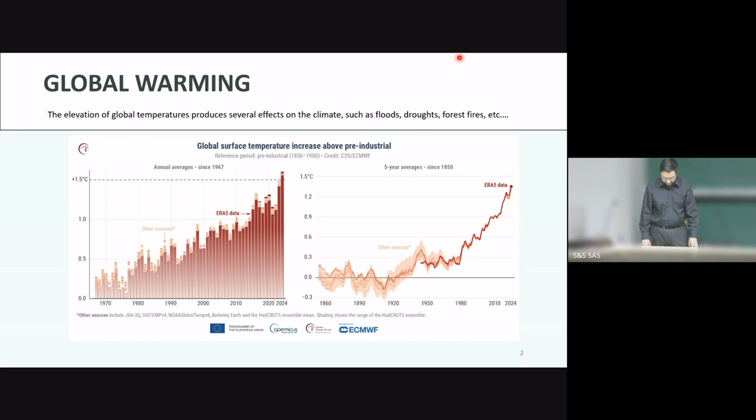Regarding global warming, we have seen the increase in temperatures during the last decades, and this rise in temperatures has many different effects on the climate, such as floods, droughts, and forest fires, among others. This rise of temperatures is linked with different activities of different sectors, among them agriculture, deforestation, or other sectors.

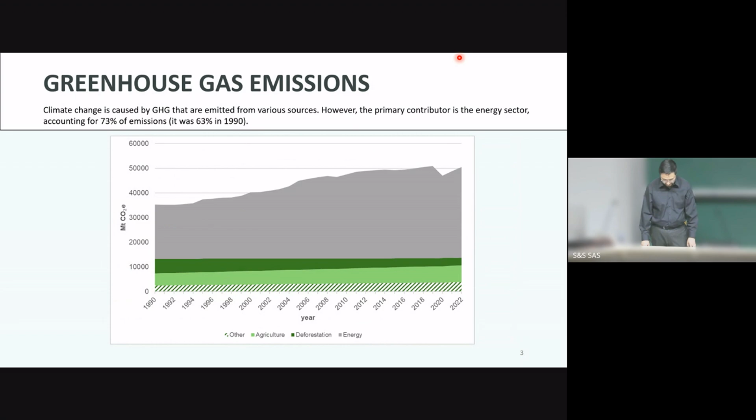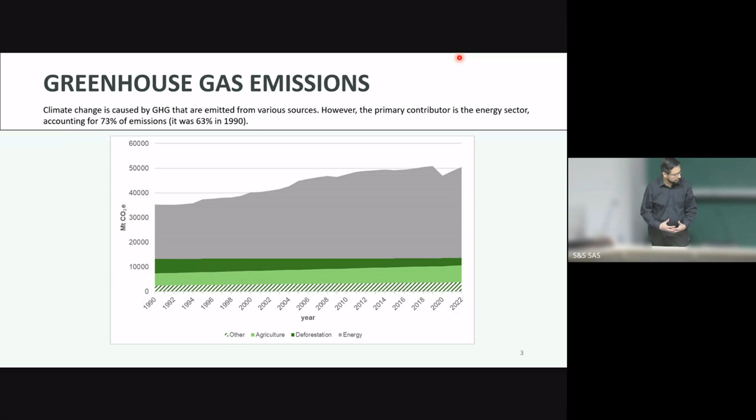But there is one key sector which is responsible for most of these greenhouse gas emissions, and it is the energy sector. As you can see, it's a sector that is increasing over time. And it's for this that it is important to study the assembly of the energy system.

To take a look into the energy system, we can start by looking at the demanding sectors such as transport, industry, or residential. These demanding sectors of energy will take the energy initially from primary resources.

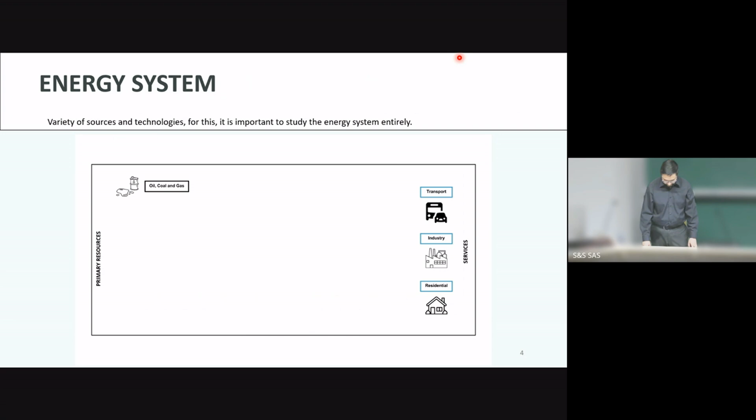We can see for example oil, coal, and gas, which can be transformed and processed to obtain energy in different forms, such as fuels or heat, for example.

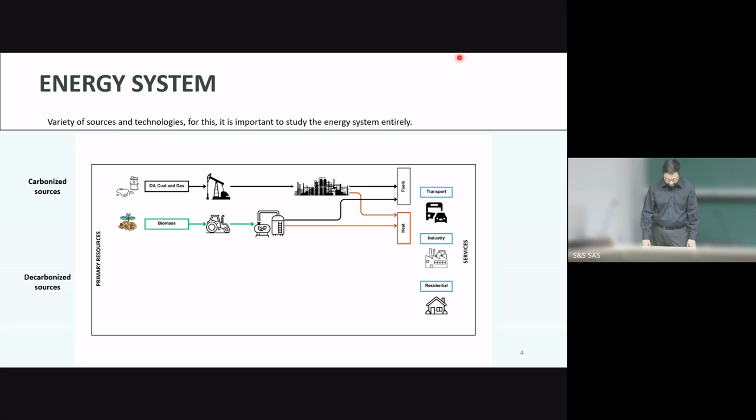If we take a look at these resources, oil, coal, and gas, we can see these are carbonized sources. But we can alternatively get fuels and heat from renewable resources, for example biomass, which can also be processed to obtain these forms of energy.

But we can also use these fuels to produce electricity and, as a side product, heat through cogeneration. We can also have other kinds of decarbonized sources, such as nuclear energy, to produce electricity, and we can also have renewable sources to produce electricity directly.

So here we can see electricity is a complex system. It's not only consumed by all the sectors, but it is also produced from a diversity of primary energy sources. This is why during my thesis I focused mostly on the analysis of energy strategies to produce electricity.

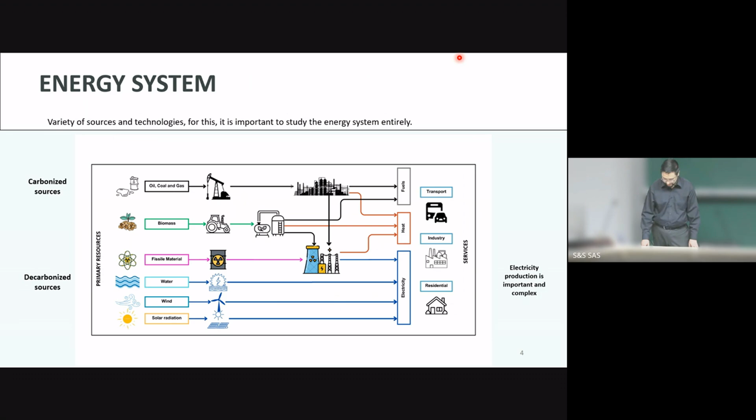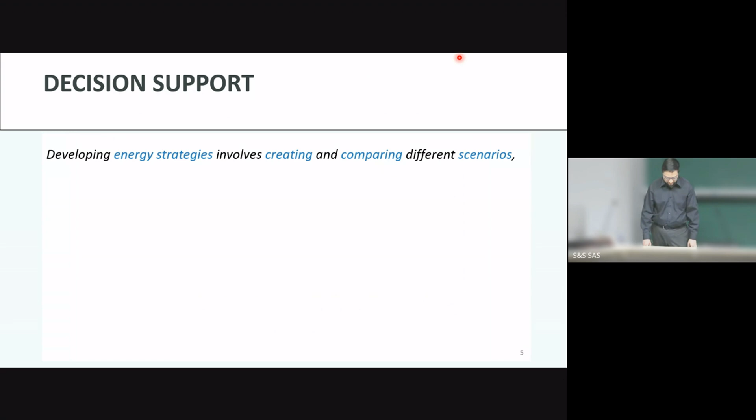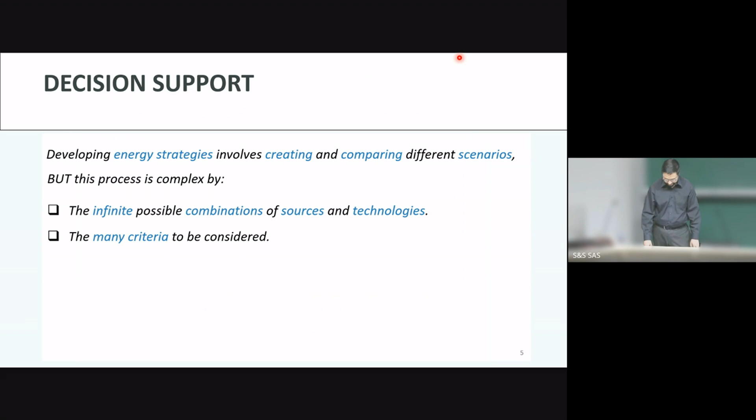To develop these energy strategies, the process involved creating and comparing an important amount of different scenarios. But this process is complex due to many reasons. One is that there is an infinite possible number of combinations of sources and technologies to produce electricity. And there is also many criteria that can be considered regarding the different cases.

During my thesis, I used two study cases: one is Cuba, and the other one is the region of Grand Est. These two cases are different regarding the potential of renewable energy sources and also the geographical location. But in any case, we will find that the energy costs are always a critical aspect to consider.

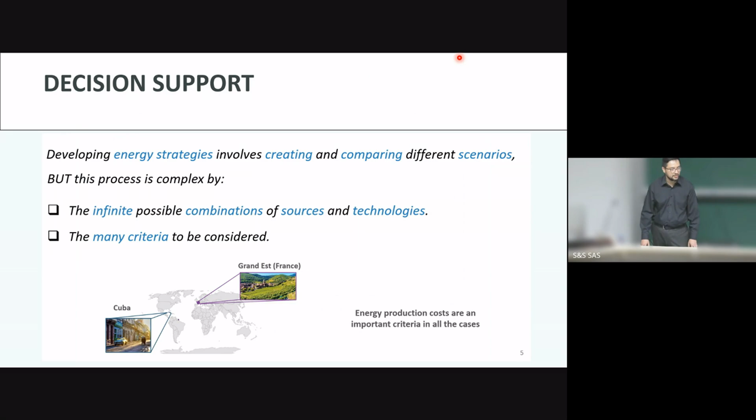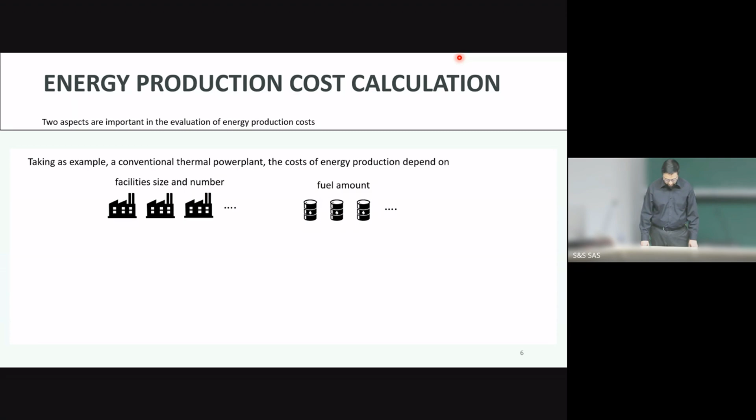So now, to show how we can calculate the energy production cost, we can take as an example the conventional thermal power plant. There are two aspects to producing electricity from this type of facility: one is the number or size of the facilities, and the other one is the amount of fuel needed to produce the electricity.

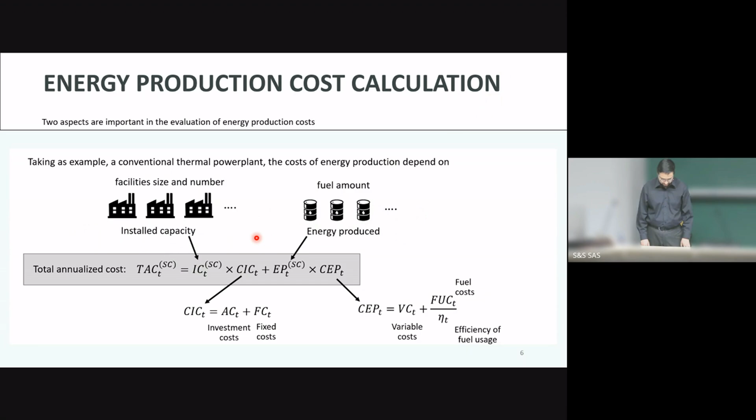To estimate the cost, we can express it in the form of a total annualized cost, and it will depend on two terms linked with these characteristics: one is the installed capacity, and the other one is the energy produced. As parameters, we have the characteristics of the technologies in the system linked to the installed capacity - the investment cost and fixed cost - and associated with energy production, we have the variable cost and the fuel cost to produce the energy.

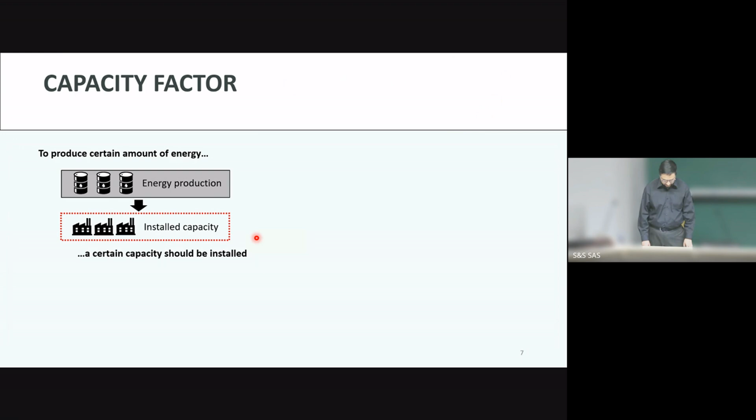To produce a certain amount of energy, we should install a certain power capacity to obtain this as a product. If this capacity is fully used at 100%, we will produce an amount of energy equivalent to the installed power capacity. We define the ratio between these two quantities as the energy production over the installed capacity - we can define it as the capacity factor. In this condition, it will take the value of 1.

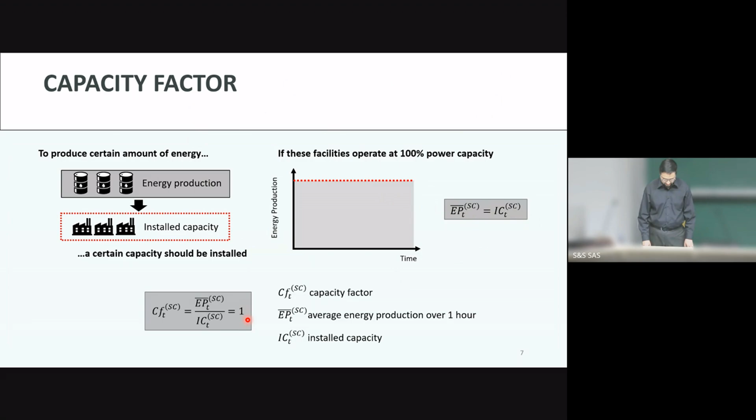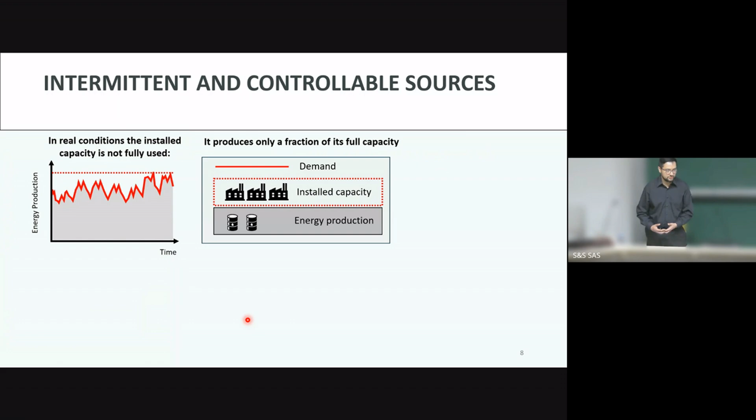But in reality, this doesn't happen like that. The installed capacity is not fully used, and it will produce only a fraction of the energy that it can produce in ideal conditions. As a result, the capacity factor will always take a value lower than 1.

This is due to several reasons. One is the need of maintenance, so we need to stop the facilities to do maintenance activities. Other one is the time variation of the demand, and the other one is the availability of the resources itself.

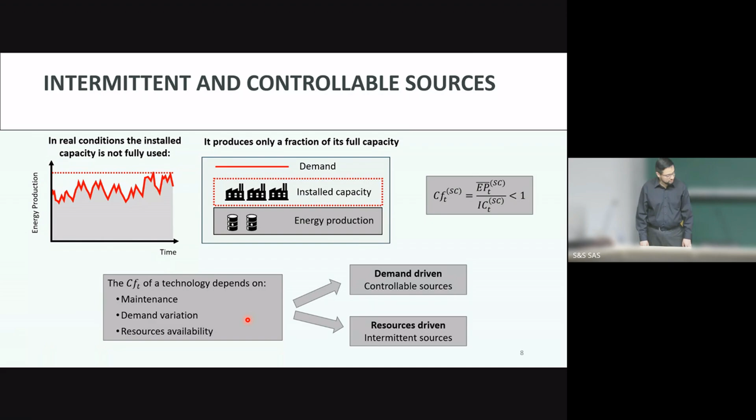Based on that, we can identify two types of resources. One is the demand-driven resources, which we call controllable resources, and they're able to follow the demand variation over time. Another type is the resource-driven resources, which we call intermittent resources, and they have two characteristics: they cannot follow the variation of the demand over time, and they cannot produce energy if the primary resource is not available, meaning if there is no solar radiation or wind blowing.

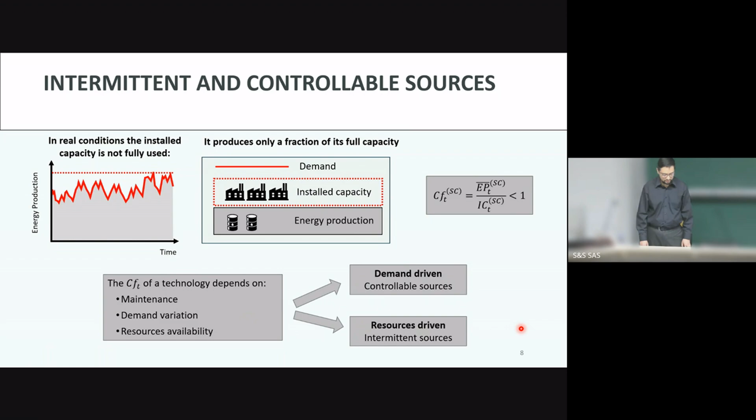To illustrate the interactions between these two types of resources, we developed this figure, this plot, that shows the energy production of these two types of sources, the controllable sources and the intermittent sources, for different percentages of introduction of solar and wind energy into the system.

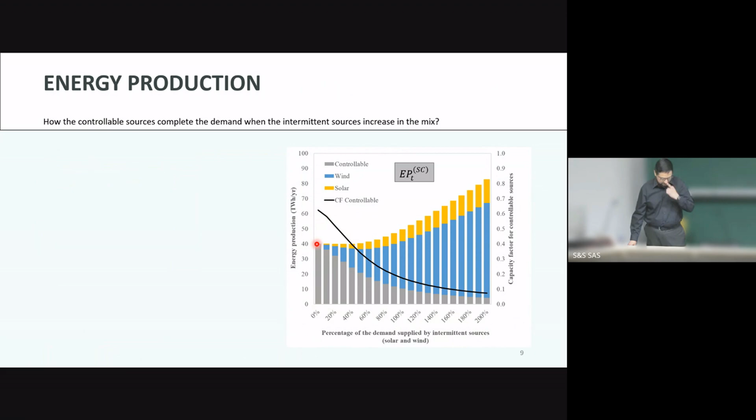We can see the trend along this driven variable: when we have a small introduction of intermittent energy sources into the system, when we have solar, sun, and wind, we will produce energy from these sources. And when we don't have these resources available to produce electricity, we will need to complete the demand with this gray part that represents the controllable sources.

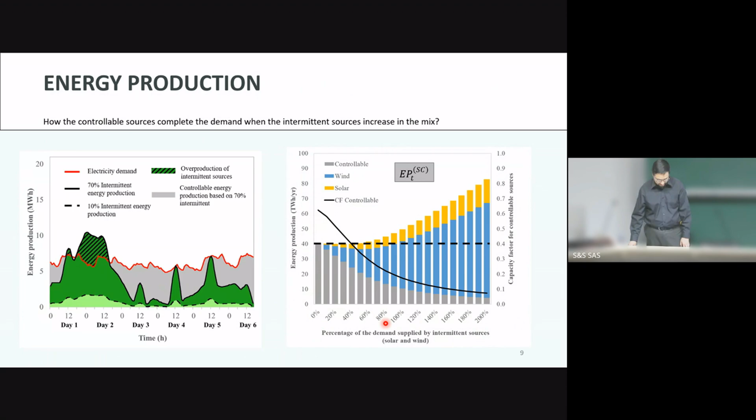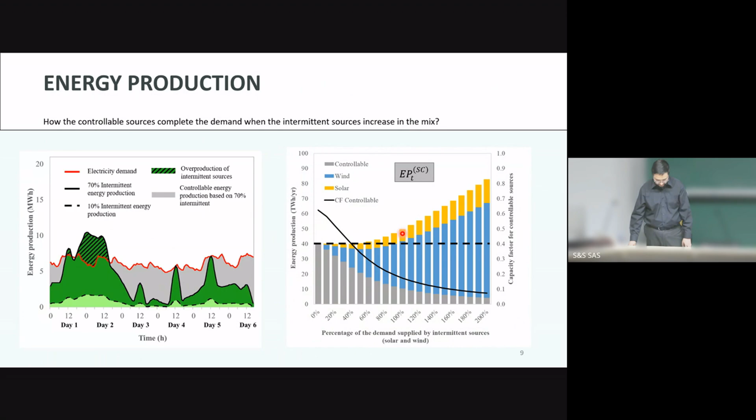As a result, with an increasing rate of intermittent energy production, we will reduce the energy production from the controllable sources progressively, and we will also have moments in which the resources are available with a sufficient amount to overproduce energy even beyond the demand. In those cases we will have an overproduction situation. That's why in some of these scenarios of a large installation of solar and wind energy sources, we have a net overproduction of electricity.

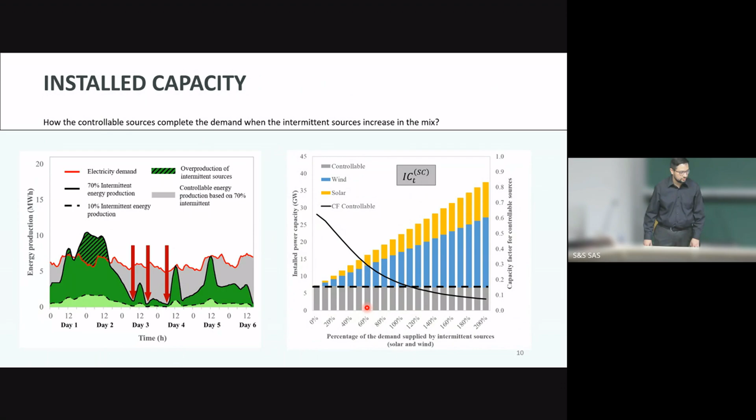Now, in a similar way regarding the installed capacity, we see that it is necessary to maintain the installed capacity despite the introduction of energy sources in the system. This is because when we have moments when no solar radiation or wind is present in the system, we still need to produce electricity in an enough quantity to complete the demand and reach the peaks. So this power capacity remains necessary.

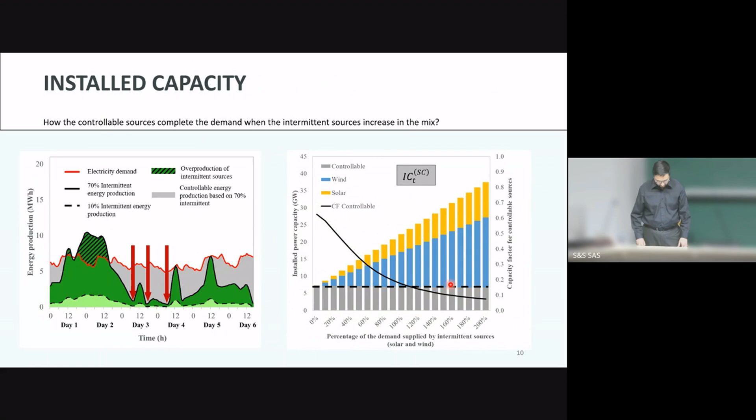As a big result of these interactions, if we take a look at the capacity factor of the controllable sources, we see that it will decrease progressively with the introduction of solar and wind sources, due to the phenomenon I just showed you before.

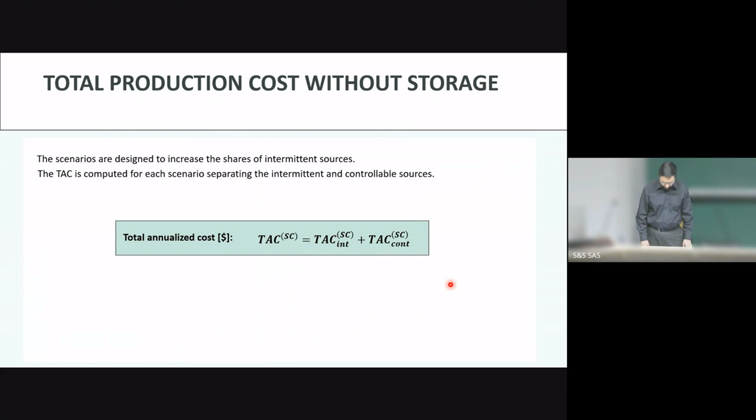Now, how can we estimate the total annualized cost of a scenario using this distinction between intermittent energy and controllable energy sources? We just add the cost associated to these two kinds of sources. Starting with the intermittent sources, we use the expression I just showed you before. If you remember, we have the installed capacity and the energy production of each source for solar and wind, and the parameters depending on the technologies. But with the intermittent sources, we don't have a fuel consumption or variable cost.

Now we will define some parameters. One first parameter is called alpha. It's the energy produced by solar and wind over the demand of one scenario, and it will represent the part of the demand that is produced from these intermittent sources. In this share of intermittent sources, we will have a distribution between solar and wind. This parameter is called beta solar or beta wind.

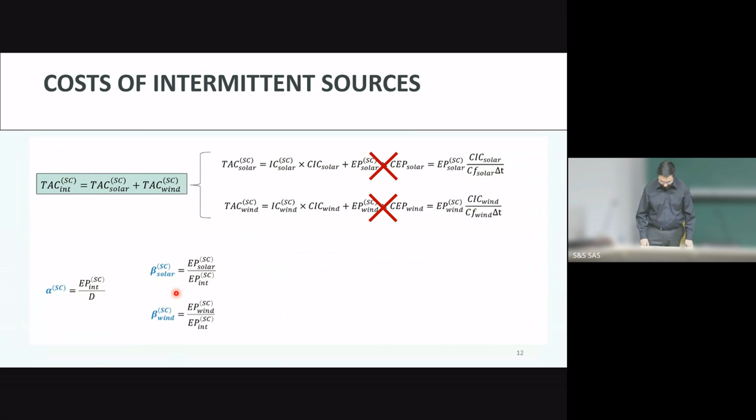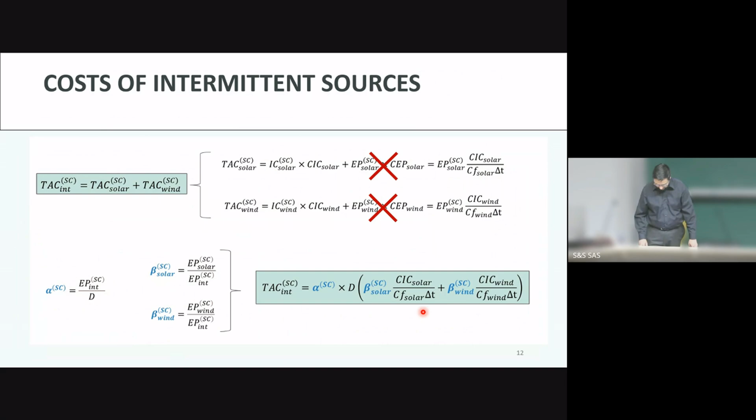Like this, we can rewrite our equation of intermittent total annual costs based on these parameters. This is useful because we will generate our alternative scenarios by varying these two parameters.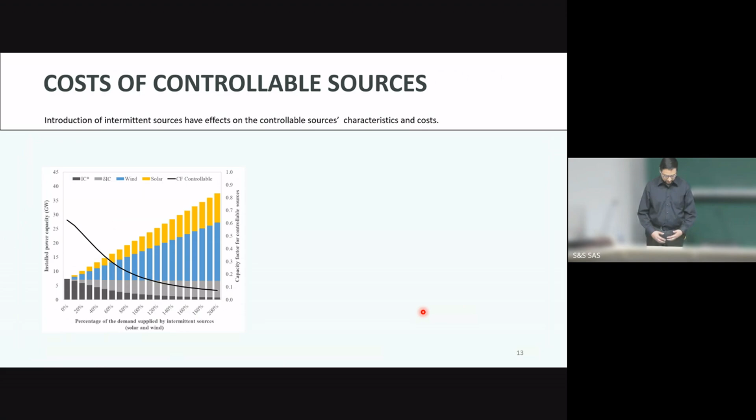Now, regarding the cost of controllable sources, if you remember, this plot is for the installed capacity of the sources in the energy mix, in the energy system. We can split the controllable installed capacity into two parts. The first part, we call IC star for a scenario, and it represents the installed capacity needed to produce the controllable sources when there is no presence of intermittent sources in the mix.

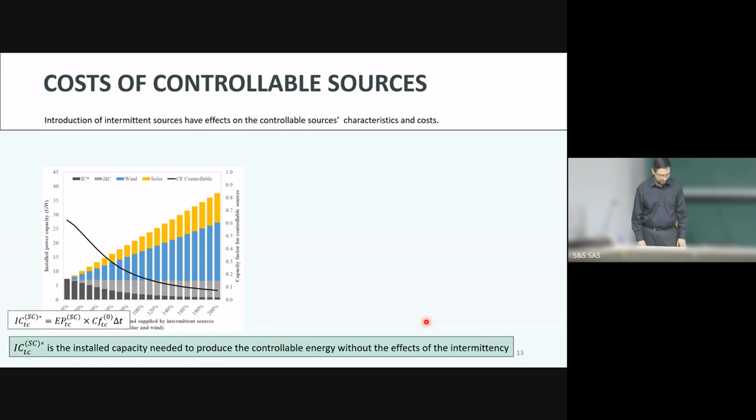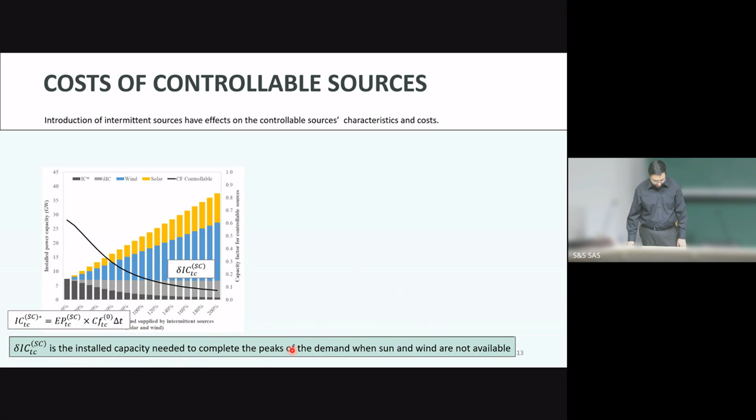And we will have a second part of the installed capacity of controllable sources, which we call delta IC, and it will represent the part that should be installed to complete the intermittency due to the introduction of solar and wind into the system.

In the mathematical form, if we take a look at the equation to estimate the cost of the controllable sources, we will initially sum up the cost for each technology. For each technology, we will use the expression I showed you before, splitting the installed capacity into two terms, each with its associated cost parameter. As a result, the total annual cost of the controllable sources will have two parts: one linked to IC star and one linked to delta IC for each scenario.

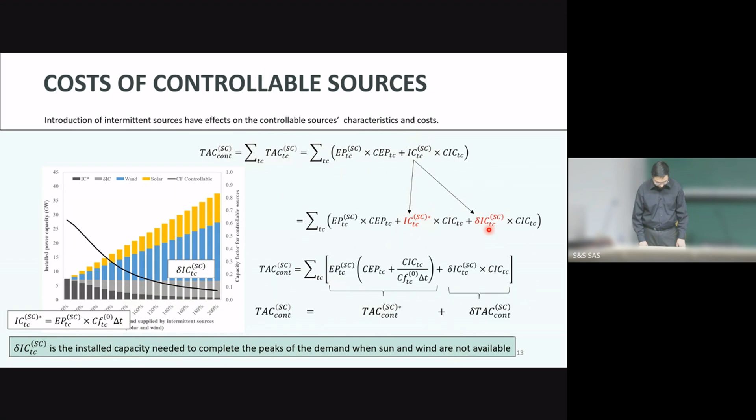Now we will define another parameter, called gamma, which represents the fraction of the energy produced by the controllable sources from one technology in the mix. Using this, we can rewrite the total annual cost star using again the concept of the capacity factor.

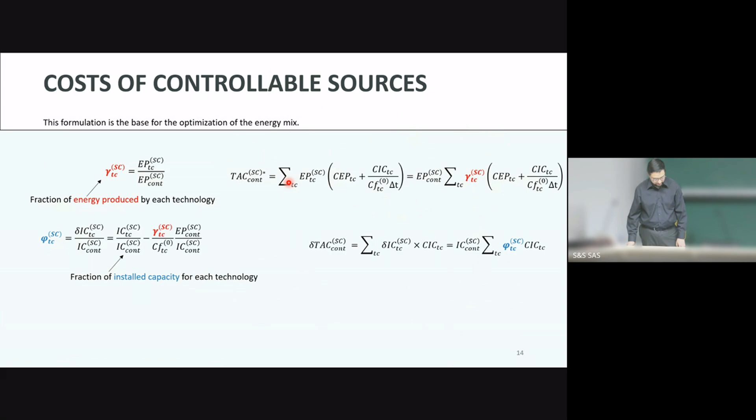We also propose another parameter called phi, which is the fraction of the installed capacity of each technology in the mix. With this, we have two expressions to estimate the total annual cost of the controllable energy in the system, corresponding to the sum of these two terms.

This is an important part of my work and an important contribution because it allows us to optimize the costs. As you can see, there is an interaction between these two terms, representing the mix of technologies in the energy system. With this formulation, we can use two sequential steps: first, optimize the initial term by minimizing the total annual cost star to fix gamma, which gives us the energy production of each controllable technology in the mix. Second, we optimize the second term to fix the mix regarding the installed capacity of each technology.

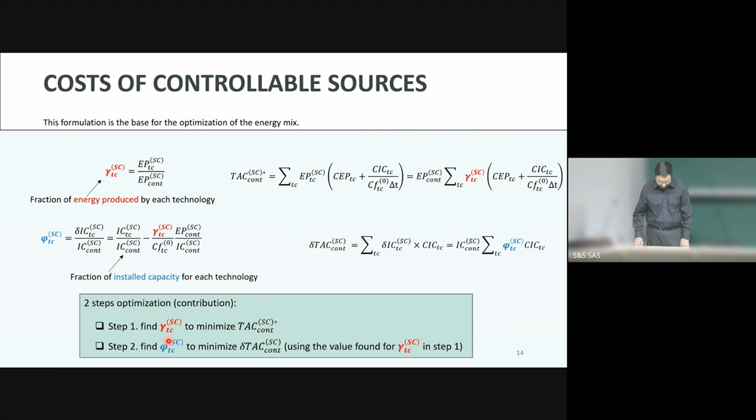To do this, we developed a model structured in two modules. The first module performs an energy balance using as input data the hourly variation of demand and the hourly intermittent energy production. It uses the residual energy, the difference between energy demand and intermittent energy production hourly, to calculate the controllable energy sources.

When there is enough intermittent energy production to fill up the demand, we use the intermittent energy. But when the intermittent resources are not available, the model gives us as a result how much energy should be produced from the controllable sources to fill up the demand.

We perform this calculation for many scenarios, which are generated by varying the alpha parameter and the beta parameter I showed you before.

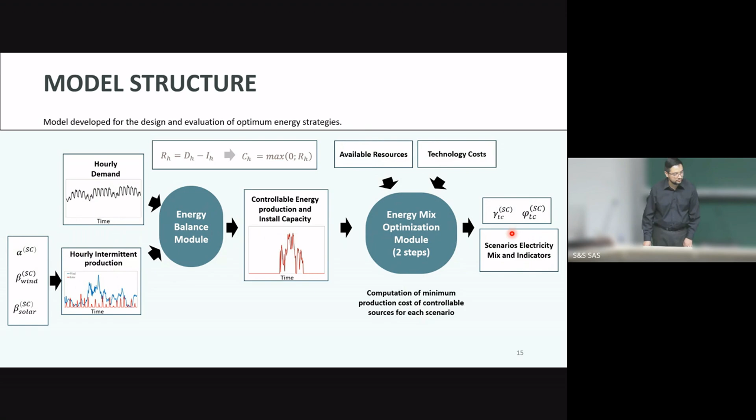Then, in a second module, we perform the optimization of cost to define the energy mix. Here we introduce additional input data regarding the availability of resources and the cost of each technology in the mix. The optimization of cost gives us as a result the share of each technology regarding energy production and installed power capacity.

As a result, based on these characteristics of the resources, we can also compute a set of indicators. These indicators are compared to a baseline scenario, using as baseline an official projection of the energy system or an official plan. To illustrate this, this is the case of the Grand Est region, the SRADDET plan for 2050. The formulation we use for the indicators is a ratio between the characteristic in a generated scenario and the characteristic projected by the official plan.

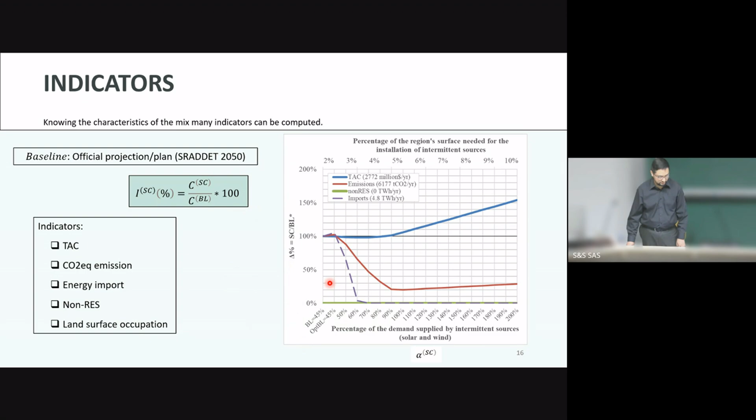So here you can see that the costs are quite similar to the baseline scenario, and then start to rise when the energy starts to be overproduced. The other indicators, such as greenhouse gas emissions and energy imports, are reduced with the introduction of intermittent energy into the mix. In the case of the Grand Est region, the use of non-renewable resources is zero, since the plan already considered there would be no use of non-renewables in 2050.

The model we developed also gives us information on the energy mix, the electricity mix.

Here, the big plot represents the cost of different scenarios. Each bar is one scenario, and each color represents one technology. You can see there are two types of colors for each technology: the continuum color represents the fuel cost or variable cost, and the hashed color represents the fixed cost, mostly the investment costs of each technology.

So like this, we can see the trend the scenarios follow when intermittent energy is progressively introduced, compared to the baseline scenario. We identified three types of scenarios: when there is a small introduction of solar and wind energy sources into the mix, it's similar to the baseline scenario regarding cost.

Here we have the energy production and installed capacity, the two characteristics we talked about before. We can see that scenarios with low introduction of these intermittent sources are similar to the baseline.

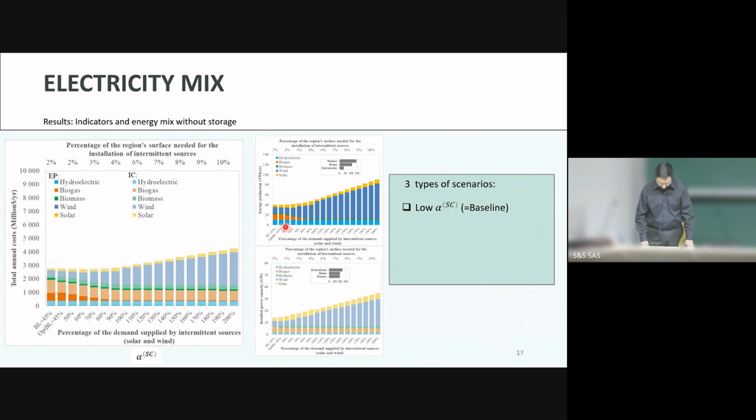When the introduction of these intermittent energy sources starts to be more important, we see that the controllable installed capacity remains necessary despite the introduction of intermittent energy production.

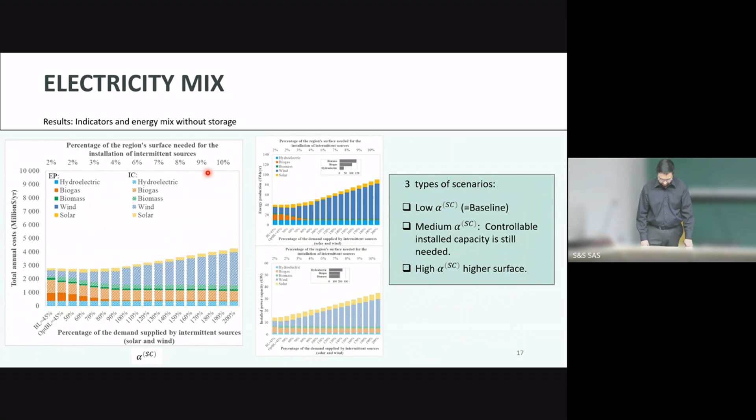And when we have a large share of intermittent sources, we see that we will need progressively more surface to install the infrastructure.

Now, those scenarios were without energy storage. If we want to consider the storage of energy in our model, we'll take another look at the model structure. Regarding the energy balance, we introduce the same input data.

And as output, we will include the storage of energy. So when there is an overproduction of intermittent energy, we are able to store this energy and then use it when there is not enough intermittent sources available to produce electricity.

This will have effects on the controllable energy sources again. We can also have a situation where we've already consumed all the stored energy, and we need to call on the production of controllable sources.

So in this first module, we compute these two characteristics: the energy storage and the controllable sources, which are then fed into the second module to optimize the cost and set the energy mix.

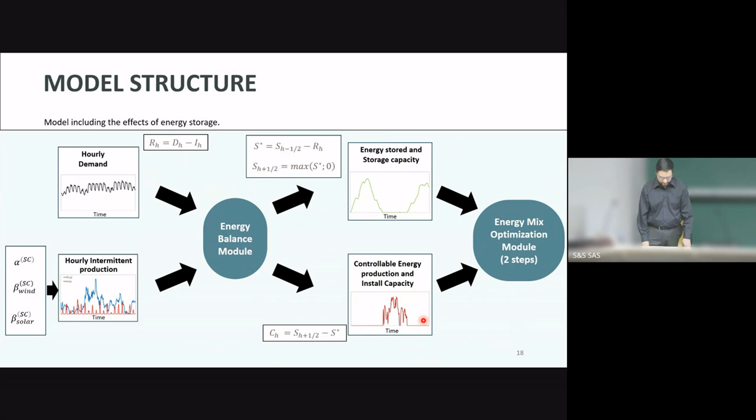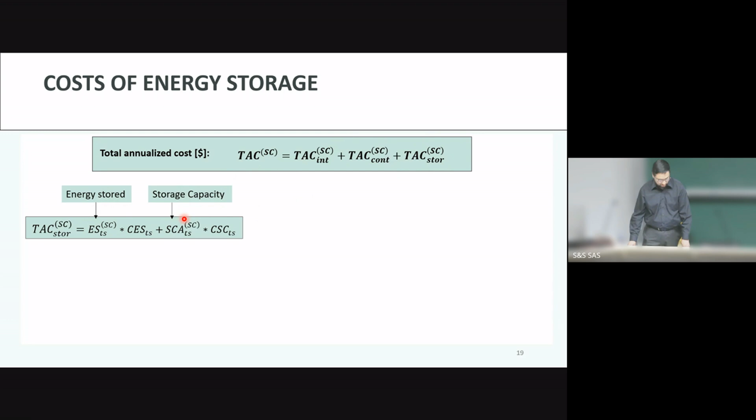To estimate the cost of energy storage, we add a term to the total annual cost for the part that corresponds to energy storage. The form of the equation is similar to the energy sources: we have two terms, one regarding the amount of energy stored, and a second term linked to the storage capacity in the system.

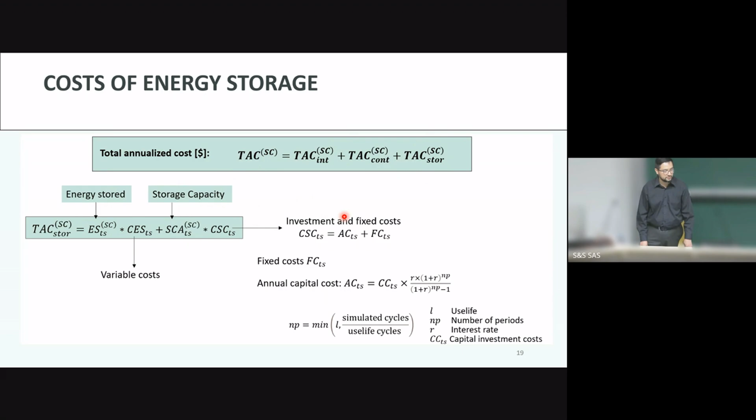The parameters also depend on the technology. It will correspond to the variable cost and the investment and fixed cost of each technology, computed regarding the specific characteristics of each technology.

For energy storage, there are many available technologies. We have, for example, some gravitational and inertial technologies available to be used. For our analysis, we chose only one, the cheapest one.

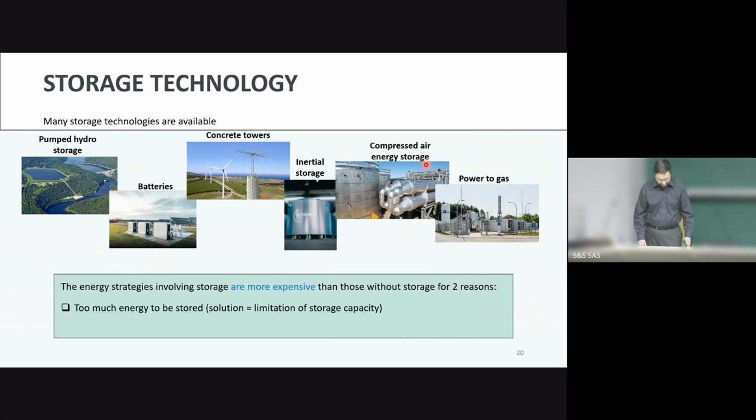And we got results that show us energy storage is too expensive for two reasons. The first is that stored energy needs a lot of capacity; we need to store a lot of energy in some scenarios.

A possible solution to that will be to limit the storage capacity in those cases. Another reason is that the storage costs are just too high to invest in. The solution for that will be to reduce the cost of implementing these technologies.

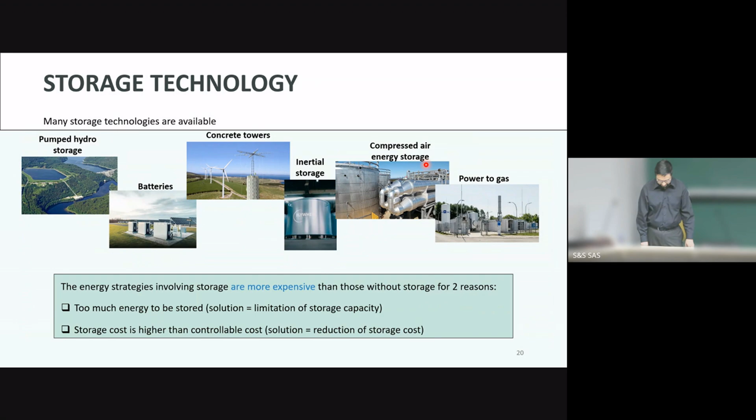As a result of the energy mix with energy storage, we used, as I said, the cheapest technology, and we divided its cost by 50. These are the results. We identified again three types of scenarios when we involve energy storage.

The first, again, is when we have low introduction of solar and wind sources into the mix; it will be similar to the baseline. The black line here corresponds to the cost of the scenarios without energy storage.

This means there is no big difference between the scenarios with storage of energy and without energy storage. In fact, we have here the cheapest scenarios between those two types. So when we have energy storage, there is not really a big difference; we don't have a big benefit.

But when we introduce a greater share of solar and wind energy sources, we improve at the same time the indicator of greenhouse gas emissions, and we reduce the need for importing energy.

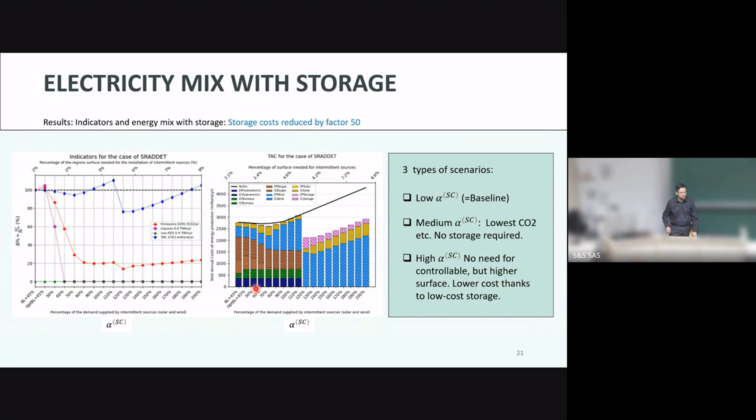And if we introduce a larger share of intermittent sources, we can see that with the use of energy storage, we can get into a situation where we don't need controllable sources, but it will anyway need to overproduce energy with the solar and wind sources.

We also perform an analysis of the robustness of our results, and we found that the cost of solar and wind are decreasing, and they are actually now lower than other technologies' costs. So the trends we have seen in our results will be maintained if the trends of the cost evolution remain the same.

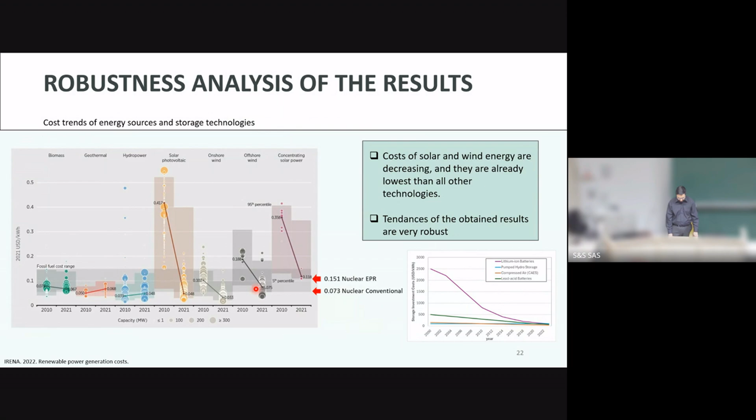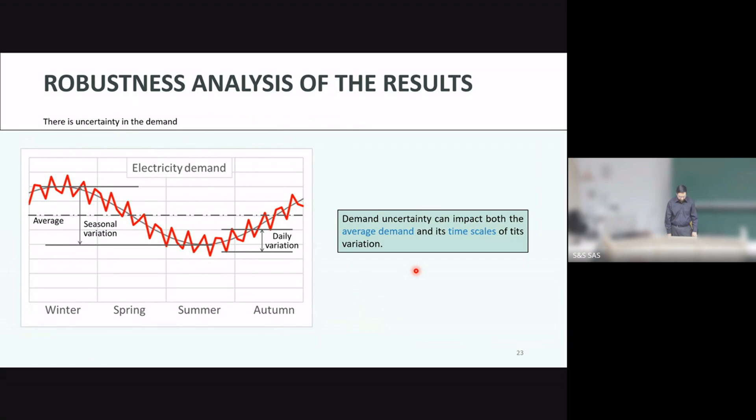Regarding the energy demand, there are two sources of uncertainty: one is the average demand, the value projected in 2050, and the other is the time scale for the variation of the demand. We performed an analysis using two projections: the official SRADDET scenario for 2050, which considers the energy demand increasing from 44 terawatt hour in 2021 to 39 terawatt hour in 2050, and a less conservative scenario considering an increase up to 74 terawatt hour in 2050.

As a result, we see that the cost will increase since we need to fill a bigger demand, and in fact we will need to introduce additional sources to complete the demand. Here, in the case of the region, we introduced nuclear energy. As a first regard, we see that the baseline is the most expensive scenario, due to the cost of introducing nuclear energy into the system.

Now, if we see the cost of the optimum, the less costly scenario, around 70% of solar and wind in the mix, we see it can be very different, going from 2,000 to the double if we consider the maximum increase of the demand. Regarding the use of land surface to install solar panels and wind turbines, it will also increase from 3% of the region's surface to 6%, which is double.

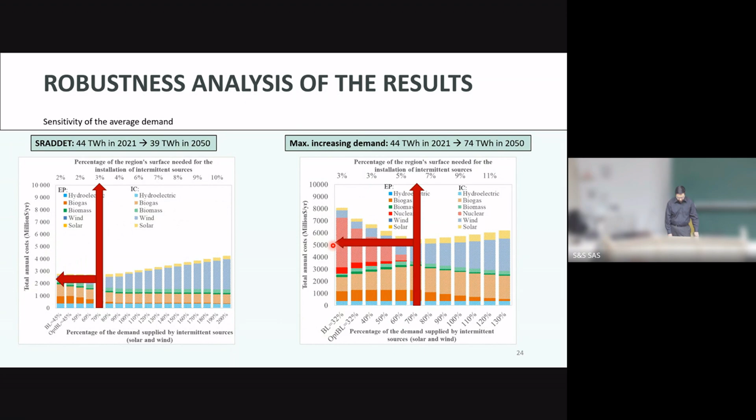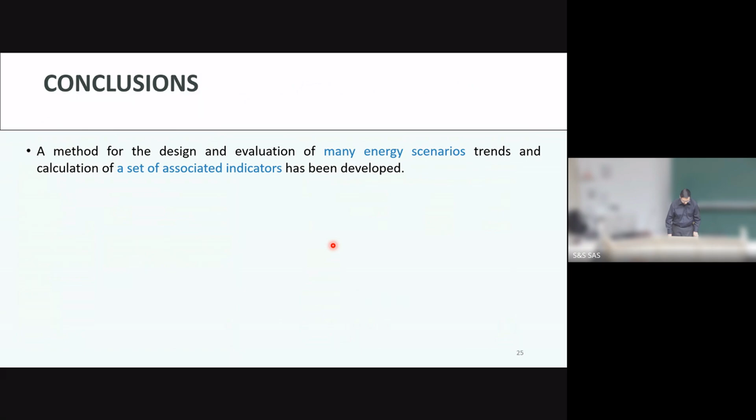Now, passing to the conclusions: we have developed a method to design and evaluate many scenarios by calculating at the same time a set of different associated indicators. The method was applied in two study cases, Cuba and the Grand Est region, and we found there is an economically competitive replacement of solar and wind sources for controllable sources when we don't have energy storage.

And the full substitution of the controllable sources by solar and wind is not possible if we don't use energy storage. But anyway, to install a great capacity of intermittent sources will be necessary to accomplish this.

The scenarios with energy storage are more expensive than the scenarios without energy storage, and there is a competition between the cost of controllable sources and energy storage to overcome the introduction of storage into the energy scenarios.

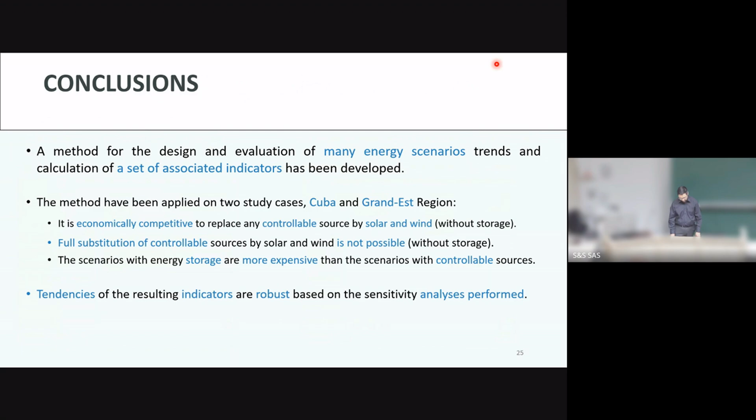Based on the analysis performed for the sensitivity of the demand, we can say that the tendencies of the scenarios we found as a result are robust, and also the trends of the indicators computed.

We also have some perspectives for future work to be done. One is regarding the alternatives of storage management—this is the different ways we can use the energy which is stored to be deployed to fill the demand.

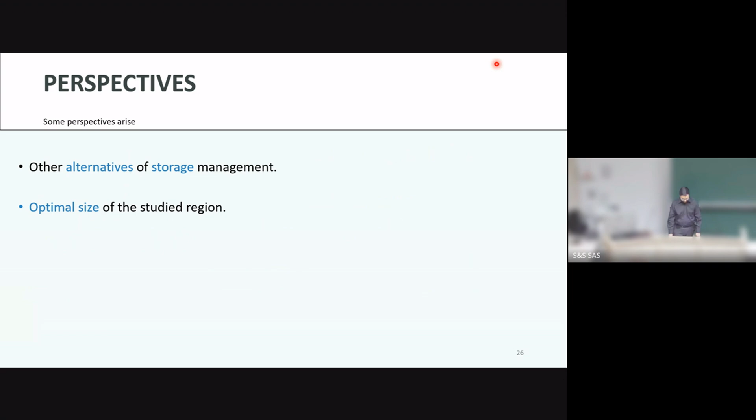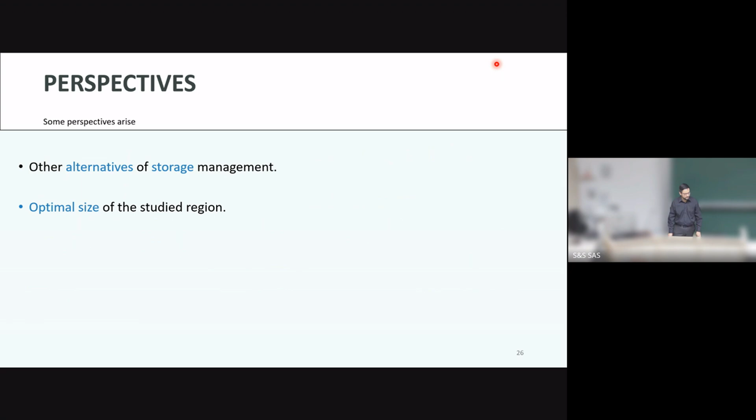The optimal size of the studied region: if we imagine the size of the region to be small, we will need to import resources to produce the local energy demand, so that means there is a restriction. And if we consider a too big region, another cost, such as the cost of transportation, will become important, and in that case the model has to be adapted. We can also think that between these two extremes there will be an optimum, and it has the merit to be studied.

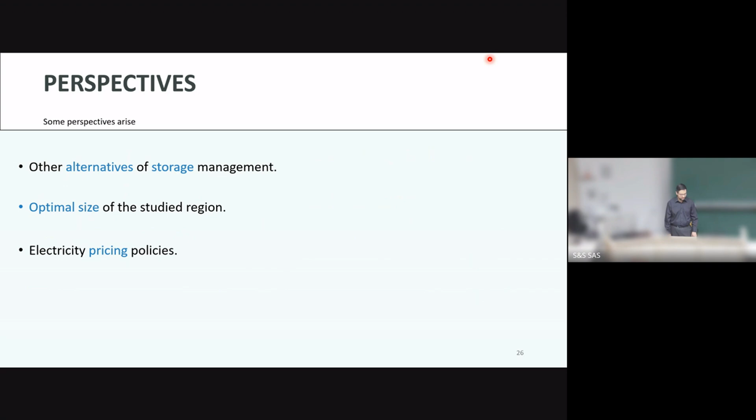Another aspect is to study the electricity pricing policies, because as a result of introducing these intermittent sources, we will have moments of overproduction, and due to the law of supply and demand, we will have moments of low prices, even negative prices. Regarding the development of the tool, the model is still in a back-end stage, so the development of a graphical user interface will be needed in future developments.